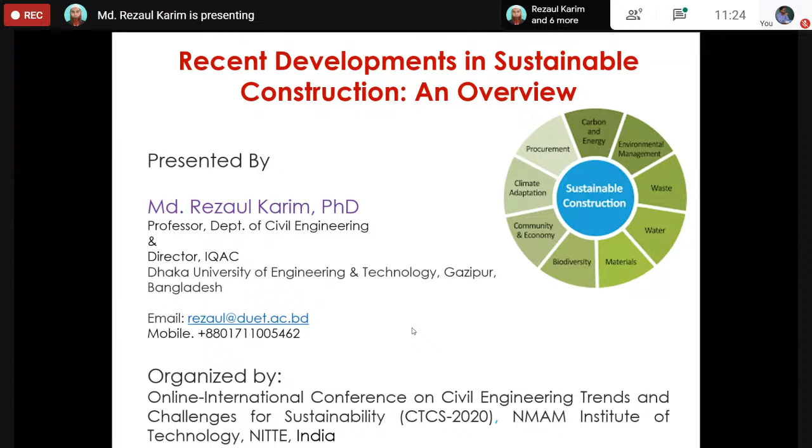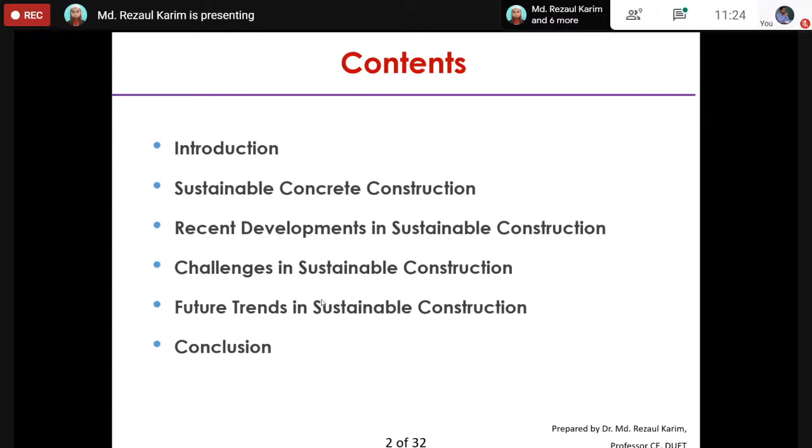Dr. Sriram has already introduced myself, so I think he has already told all the things regarding my career and also my research and additional charges. Today I will share some ideas regarding sustainable construction. In this regard, I will discuss the introduction, sustainable concrete construction, recent developments in sustainable construction, some challenges in sustainable construction, and also future trends in this area. Finally, I would like to conclude with some slides.

First, you know that the goals of sustainable construction are to reduce the industry's impact on the environment. Sustainable construction methods include using renewable and recyclable resources, reducing energy consumption and waste, creating a healthy, environmentally friendly environment, and protecting the natural environment. This is the main method and also the main purpose for sustainable construction.

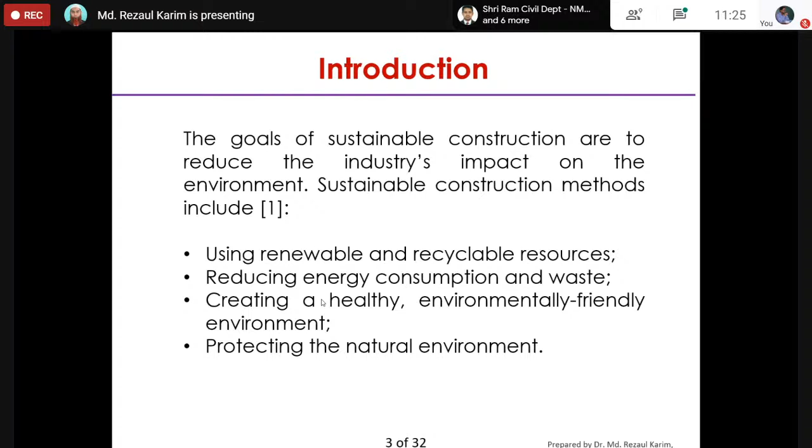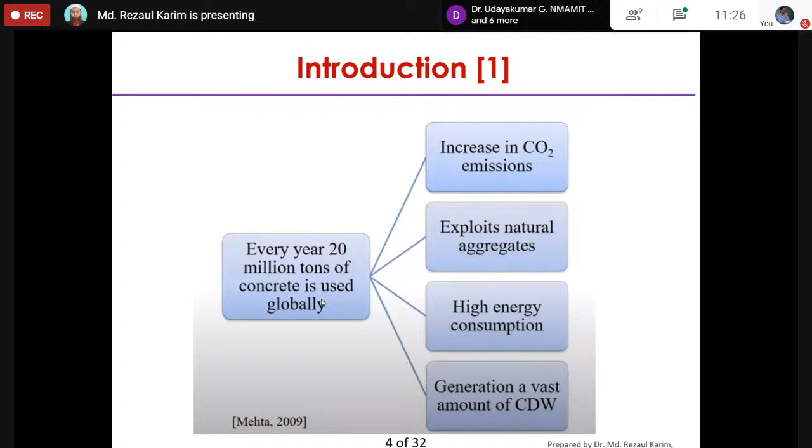In this aspect, a study from around 2009, Mehta already provided this information: in 2009, about 20 million tons of concrete were used globally. And for this reason, energy use increases carbon dioxide emissions, exploits natural aggregates, causes high energy consumption, and generates a vast amount of construction and demolition waste. I think all the students and researchers involved in the concrete area are familiar and well known with this information.

From energy use to emissions, the construction industry has a huge impact on the environment, because the construction industry uses a high amount of energy. Huge amounts of fossil fuels have been used by heavy machinery in the construction area. Even inefficient electricity use can result in the unnecessary burning of fossil fuels further down the energy supply line. In fact, the construction industry accounts for an incredible about 36% of world's energy use and 40% of carbon dioxide emissions. So the construction industry has a huge impact. I think all the researchers in this area are very familiar with this information.

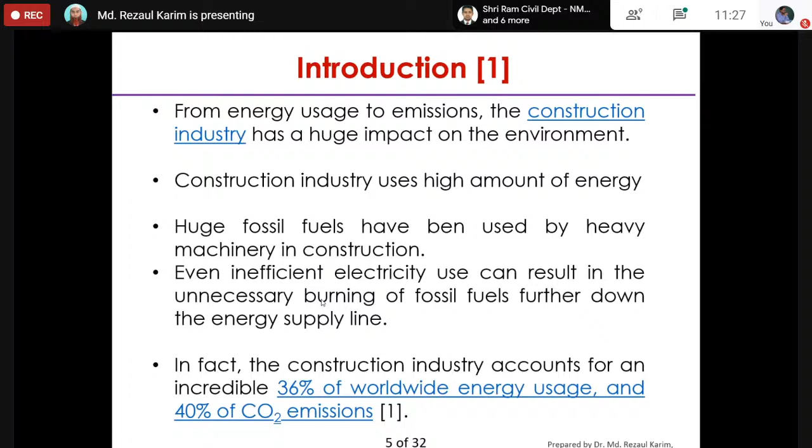In addition to this, the fabrication and shipping of materials can have a great impact on carbon emissions. Mining for raw materials can result in pollution of local water tables. The manufacture of concrete has resulted in over 2.8 billion tons of carbon dioxide. This is new information, a figure which is only going to keep increasing, as 4 billion tons of concrete is produced every year. This is the recent information. Construction can also result in hazardous waste, and improper disposal of such waste can result in pollution that affects not just the environment but also the health of the people living in that area. So these are the issues and problems arising regarding the construction area, specifically for concrete construction.

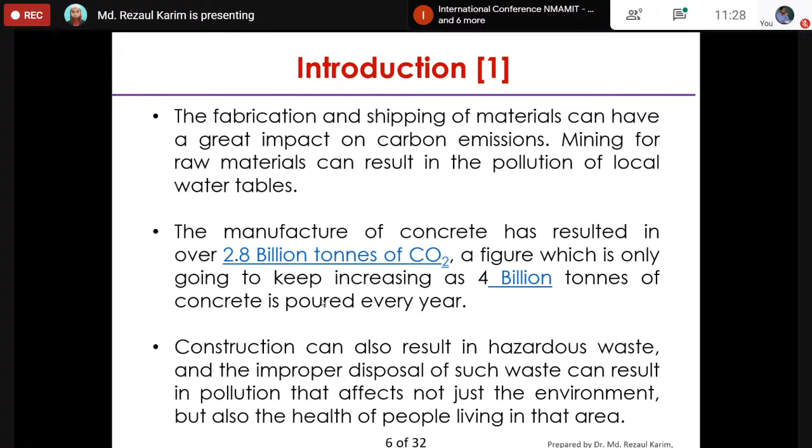This is another finding. The findings show the emission and energy requirement in cement manufacturing. Only cement manufacturing, cement without slag, I think the granulated blast furnace slag - only 30% slag reduces the energy demand and also emission of carbon dioxide. Huge changes. Also, 50% slag in cement production can reduce the energy demand. Finally, also 75% slag reduces the energy demand as well as reduces the carbon dioxide emission. So this slide is very important for the cement production industry.

That is why in Europe, America, and all over the world, the utilization of composite cement is increasing day by day regarding this issue, because without slag, the energy demand and carbon dioxide emission is too high in comparison to cement with slag and cementitious material.

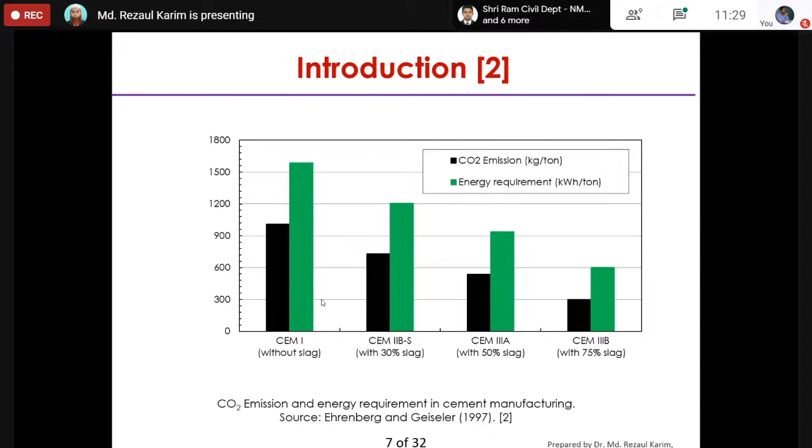Now I am going to discuss sustainable concrete. Sustainable concrete is defined as concrete that uses less energy in its production, and produces less carbon dioxide than normal concrete. This is the basic concept of sustainable concrete.

It is also known as green concrete or eco-friendly concrete in some countries. It uses eco-friendly cement, supplementary cementitious materials, and increases dependence on recycled materials.

In sustainable concrete, you can reuse water and also fly ash, metakaolin, silica fume, slag, recycled demolition waste aggregate, recycled concrete materials, recycled glass aggregate, and other waste materials as coarse aggregate, fine aggregate, or replacement of cement.

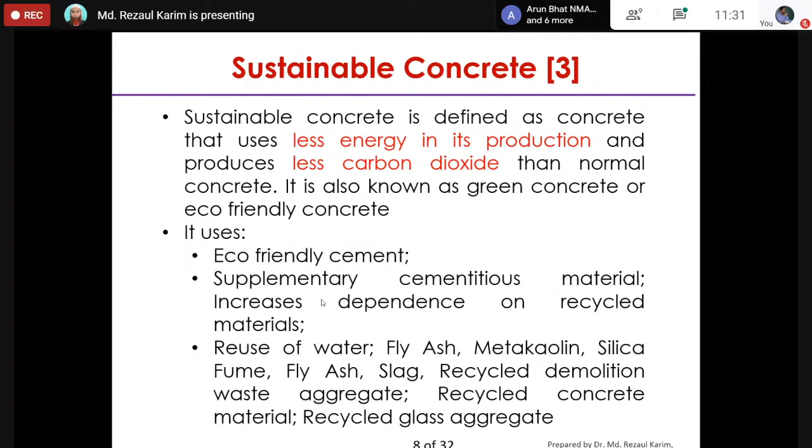This is another basic concept of sustainable concrete production: there must be a low volume of cement and low volume of natural coarse aggregate used. Also, a high volume of recycled coarse aggregate can be used, along with a high volume of slag, fly ash, palm oil fuel ash, rice husk ash, and silica fume, and other supplementary cementitious materials.

After production, the desired strength can be provided and it should be environmentally friendly. Because we use waste, minimization of waste and disposal problems can be solved using sustainable concrete production. By using recycled aggregate instead of virgin aggregate, we can preserve natural resources, and it will definitely be cost effective. This is the mechanism of sustainable concrete.

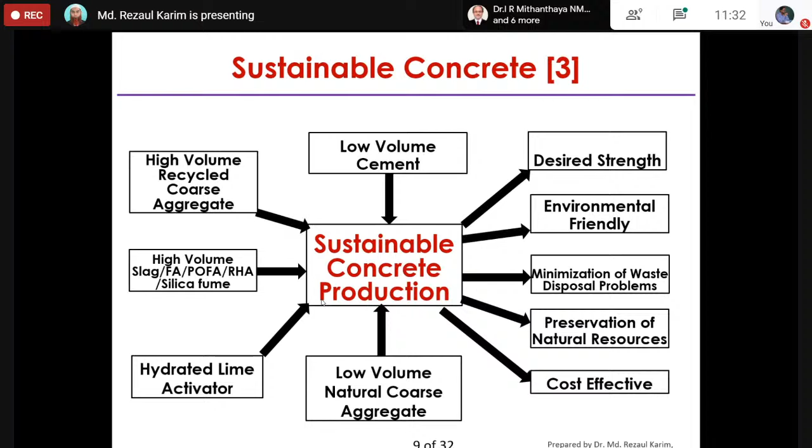These are also some information from the literature. Sustainable concrete can be achieved by rainwater harvesting and reduction in water use. It provides a 20% increase in use of waste materials, 25% reduction in weight of concrete, 30% reduction in carbon dioxide emission, 40% reduction in repair costs, better workability, reduced creep and shrinkage, good thermal and fire resistance, less heat of hydration, and less split tensile strength and flexural strength. There are no big changes, only slight changes in compressive strength.

One of the major problems is less lifetime. This is one of the problems for sustainable concrete production. This information is well known to the scientific community now. We are just sharing how to improve this area regarding sustainable construction.

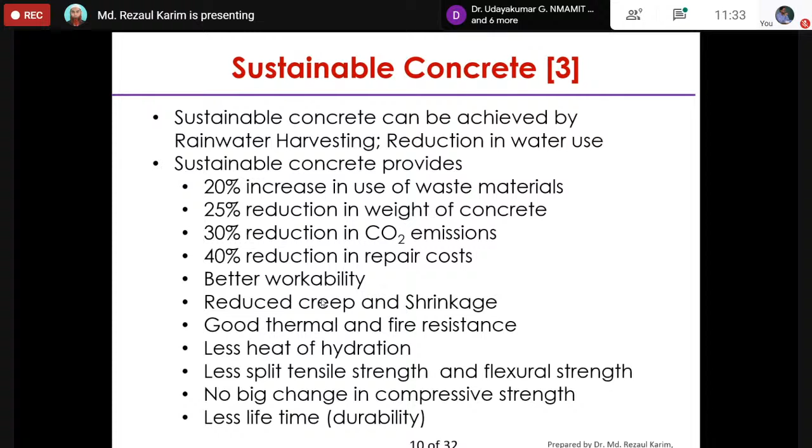Sustainability is generally defined as meeting the needs of the present without compromising the ability of future generations to meet their own needs. We know this slogan because if we use all the resources, all the virgin materials, everything during our life, our future generation will face trouble.

That is why we must consider sustainability in any area. We, the people working on concrete, are thinking regarding sustainable construction. Those working on economy are thinking regarding sustainable economy, and others in management as well. So all the people working in research and industry are thinking regarding sustainability. It is our duty to consider sustainability in construction.

There are three pillars of sustainability: environment, economy, and society. All these basic things must be considered regarding any production, any type of concrete, or any type of industry. The research must be focused on sustainable construction and sustainability.

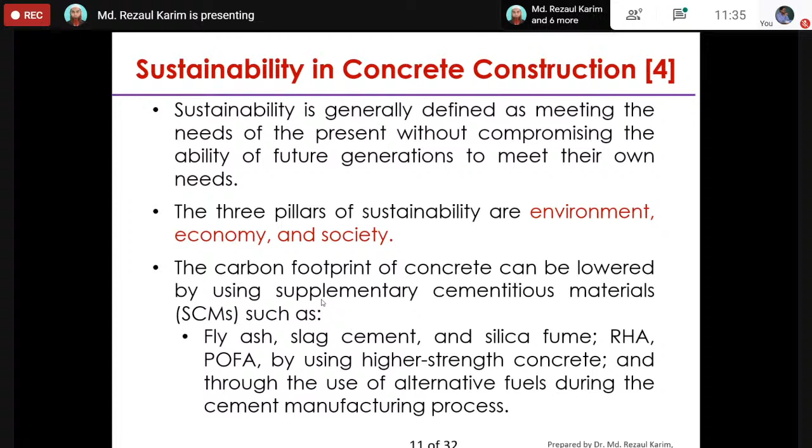These are the slogans nowadays across the world. We know what sustainability is. It must be focused on social, economical, environmental, and technological aspects, and sustainability must be feasible, equitable, and livable. All these things should be considered in our construction industry, because during any construction or production, we must focus on society, economics, environment, and technology.

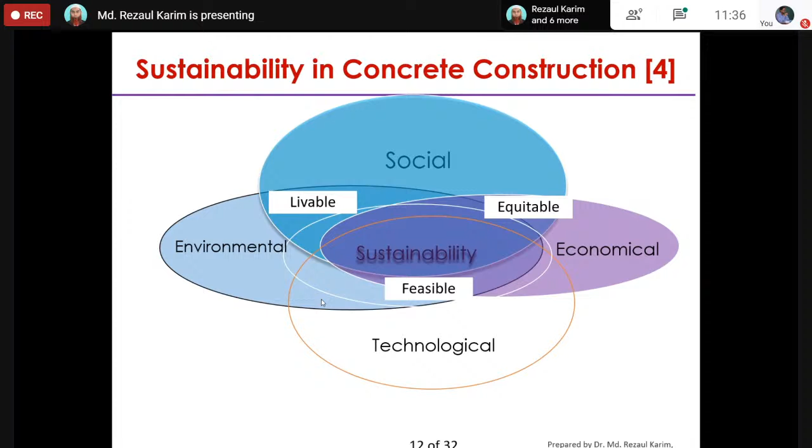Now we move forward regarding the benefits of sustainable construction. Naturally, adopting sustainable construction methods will reduce an organization's impact on the environment. There are more tangible benefits too, which will help us demonstrate the value of sustainable construction beyond environmental concerns.

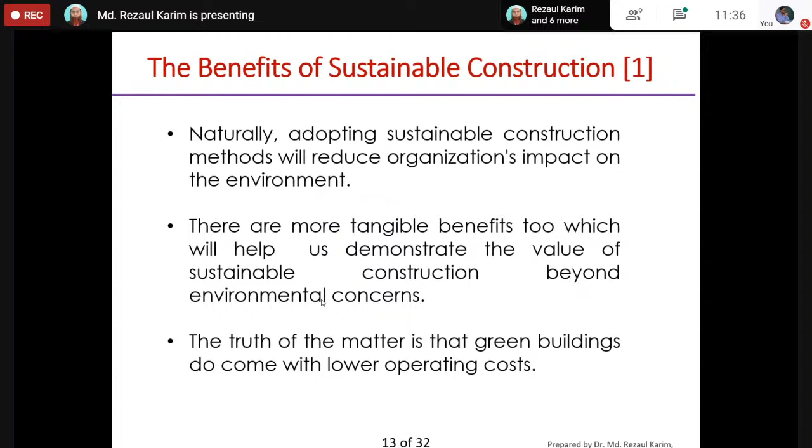The truth of the matter is that green buildings do come with lower operating costs. This is a finding from literature. The use of the latest sustainable technologies in the construction process could potentially deliver a remarkable 410 billion euros a year in savings on global energy spending.

This is another finding: there are also direct savings available for organizations by reducing waste. For instance, this will reduce the fees charged by waste management companies. This is another process that can be used for sustainable construction. By adopting more efficient vehicles, it will also save fuel costs.

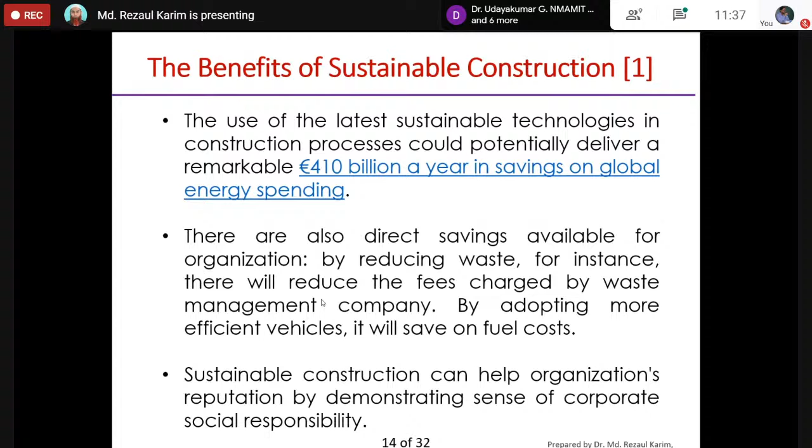Sustainable construction can help an organization's reputation by demonstrating a sense of corporate social responsibility. So there are more benefits regarding sustainable construction. I think all of this information is available to the scientific community, especially those who are using the research in laboratories as well as their studies.

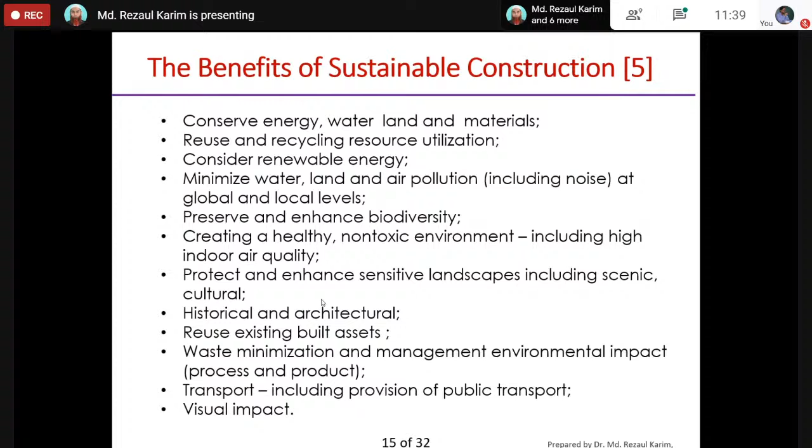So considering this issue, we must focus on sustainable concrete as well as sustainable construction. Now we'll move towards recent developments in sustainable construction.

I think this information is known to us. Geopolymer concrete is one of the latest developments. Although it was introduced by Davidovits in 1978 to describe a relation among mineral binders with chemical composition similar to zeolite, but with an amorphous microstructure.

It is a kind of concrete produced using slag or fly ash with a high amount of alkaline activator, such as sodium hydroxide and potassium hydroxide, as well as silicates like sodium silicate and potassium silicate. Usually in geopolymer concrete, the curing procedure is performed at about 60 to 90 degrees.

Another development is sustainable concrete, containing slag, fly ash, rice husk ash, palm oil fuel ash, wood ash, and so on. All of these materials can be used in concrete as a supplement for cement as well as a supplement for fine aggregate, and that reduces the cost of concrete as we've already discussed in earlier slides. Another recent development is alkali-activated binder, or zero cement binder, also called non-cement binder.

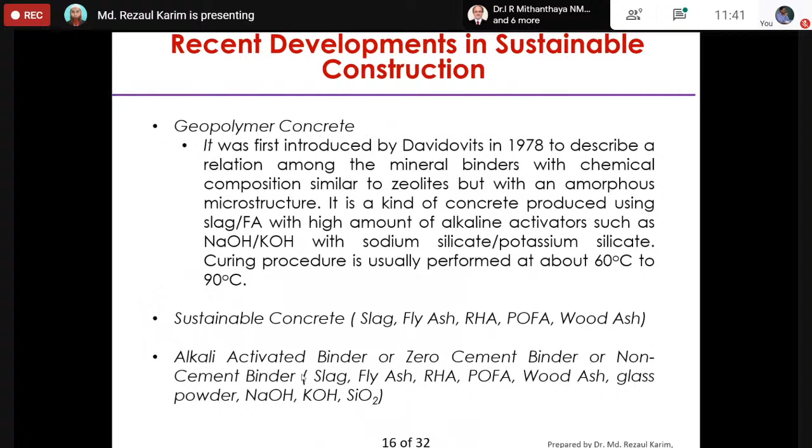This also just provides information on figures for construction service life and global warming potential, also discussing industrial waste and its remarkable lifecycle, and our demand for low carbon emission.

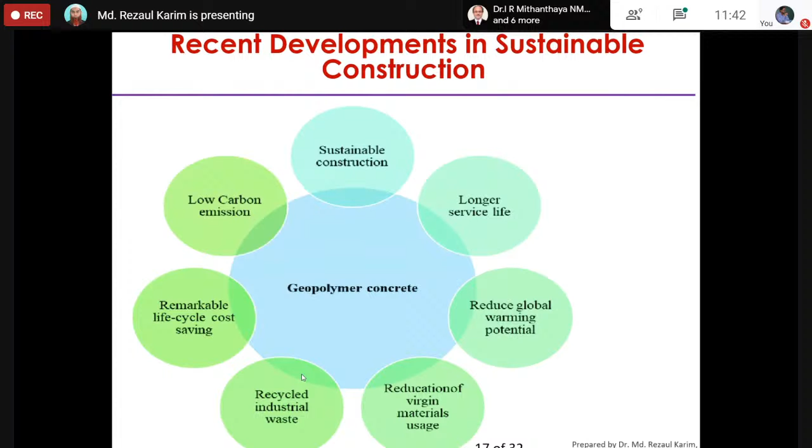Focus all the research on emissions. Global temperature is increasing day by day. That is why it is our duty and also our responsibility to sustain our world for the people, for human beings, for a comfortable life.

So it is our duty to reduce carbon emissions. You see this one, the inclusion of geopolymer material results in about 25% carbon reduction. So there is also a reduction in carbon emissions. So we can use sustainable methods for our construction.

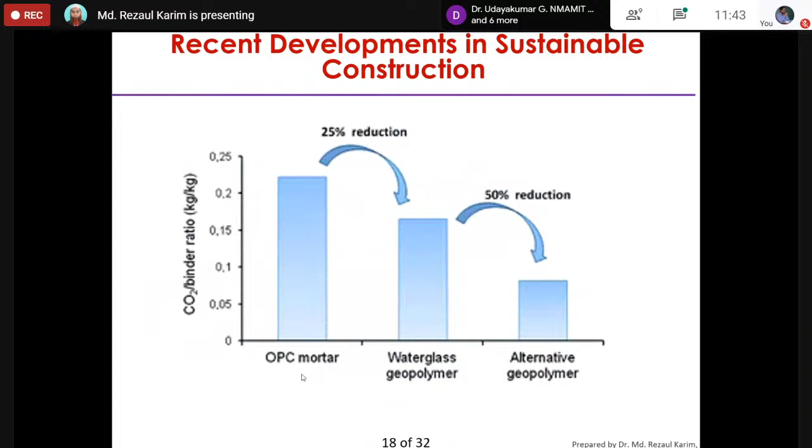These are some literatures available online. You can also see that as construction continues to expand, contractors must figure out ways to reduce their industry's detrimental impact on the environment. It is the duty of the contractors to reduce their problems on the environment.

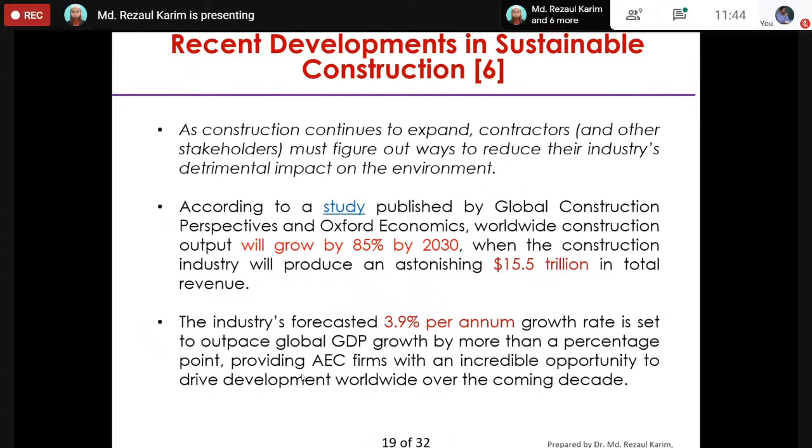While a broad-based expansion of construction industry is needed, experts estimate that 36 million new housing units will be needed to be built in the world's 20 largest cities alone by 2025. So this is the demand from the housing sector.

Such an expansion could have devastating environmental consequences. So we must mitigate and solve this requirement. It is our duty, those working in the concrete area.

Indeed, research indicates that the construction industry is already responsible for 23% of the United States' air pollution. This is another finding from the study. And 40% of the water pollution and 50% of its landfill waste. So can you imagine what's happening regarding the construction sector?

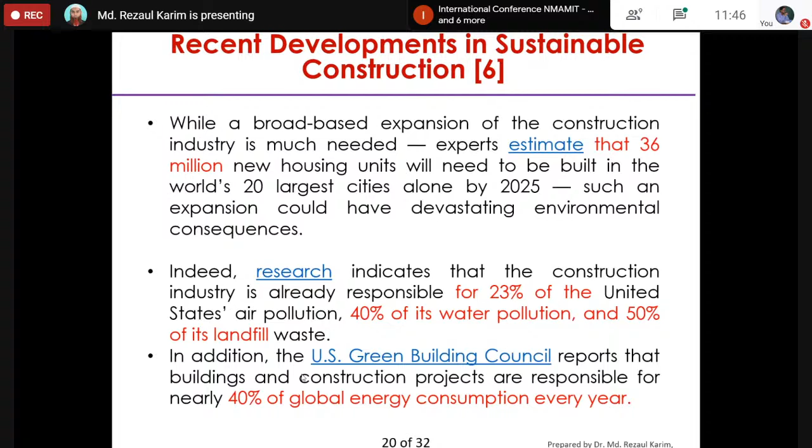So if we can manage this as a sustainable process, we can easily save our planet. In addition, the US Green Building Council reports that building and construction projects are responsible for nearly 40% of global energy consumption every year. So we the people are consuming about 40% of the total energy consumption.

Using building information modeling, we can manage sustainable construction. We are also very much familiar with sustainable construction, and we know this includes materials, biodiversity, community and economy, climate adaptation, procurement, carbon and energy, environmental management, waste and water. So all of these are involved for sustainable construction.

So we must focus to use less amount of energy and produce less amount of carbon dioxide. Our target is also to use the maximum amount of waste materials, so that we can reduce the cost as well as manage the waste for the future generation.

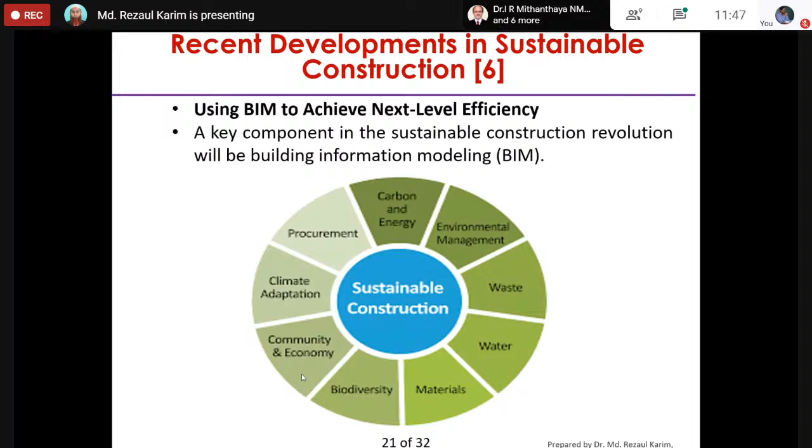These are some information regarding recent development: extending the lifespans of durable building materials. This is some findings from different literature. Also, over 160 million tons of non-industrial waste goes to American landfills, which actually comes from demolition undertaken before the beginning of new construction projects.

So this is another concern. How can we manage these types of demolition waste? Salvaging as much of this raw material as possible not only cuts down on cost. Recycled materials are often less expensive than virgin materials. It is very simple. But we must consider how we can use this recycled material for the production of construction work.

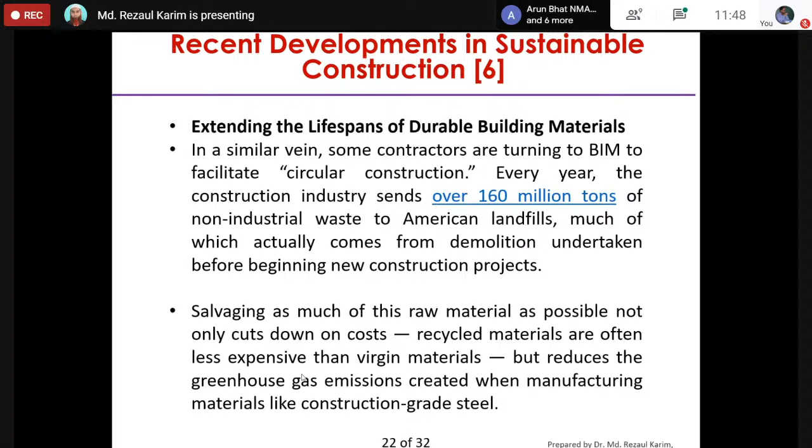And some of the industry is planning to move construction offsite. I mean, they are preparing all the elements in industry so that there will be no waste.

And finally, environmentally minded contractors are prefabricating or alternatively using offsite or modular construction. Some modern contractors are also thinking and focusing on this type of construction.

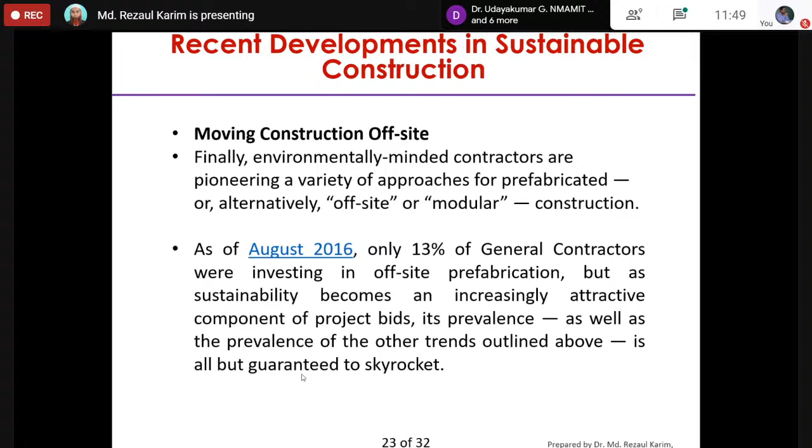Another data point: only 13% of general contractors were investing in offsite fabrication. But as sustainability becomes an increasingly attractive component of project bids, its prevalence, as well as the prevalence of the other trends outlined above, is all but guaranteed to skyrocket. So although we are focusing on offsite construction, the findings show only about 13% are motivated for this type of construction in the industry.

So these are some sustainable construction works across the globe. BRE office building, Watford, UK - the focusing point is over 1500 meter cube of recycled aggregate concrete supplied for foundation, floor slab, and columns.

Another is a building complex in Germany, with over 1500 meter cube of recycled concrete for foundation, slab, and internal structural elements. And another is from Haiti - infrastructure development, reuse of waste concrete for staircase, retaining wall, and public spaces.

So if the designer focuses on using recycled materials, we can easily manage it. From recent experience working in Dhaka city as a consultant, we already used some recycled materials for non-structural uses like false slab, retaining wall, or non-load bearing walls - where there's no load impact, you can easily handle this issue.

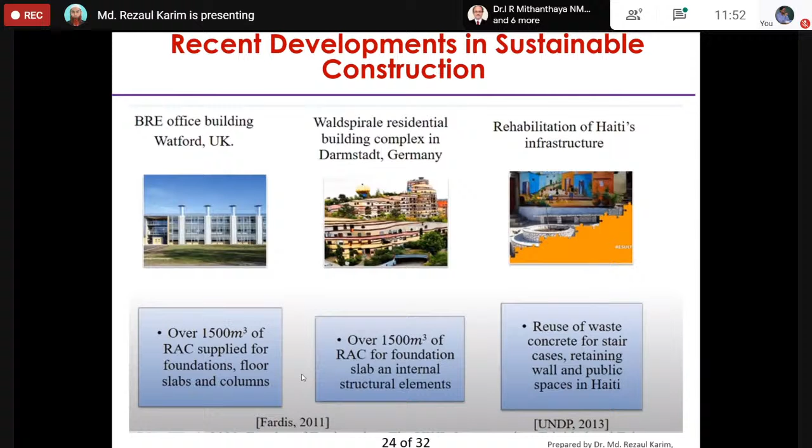So the community also needs to discuss and focus with the authority as well as the company and the designer, so that we can achieve our goal of sustainable construction.

I am going to end my presentation with some challenges in sustainable construction. Adopting the sustainable construction method is not an overnight process, because I gave some ideas regarding sustainable construction, what are the drawbacks and what are the obstacles, because it is a process.

The people who are involved must understand sustainable construction, who will benefit, and what will be the problem. The people involved in this area can inform the government so that they become bound to use recycled material.

There will always be pressure on construction organizations to reduce cost. This is another demand where possible, but there is still concern that sustainable construction methods will cost an organization more. Their thinking is that sustainable construction increases the cost of the industry.

So that is why they are not interested. The World Green Building Trends 2018 Smart Market report reveals that almost 40% of UK firms reported that affordability was the greatest challenge presented by adopting sustainable construction practice. So affordability is one of the biggest challenges for sustainable construction.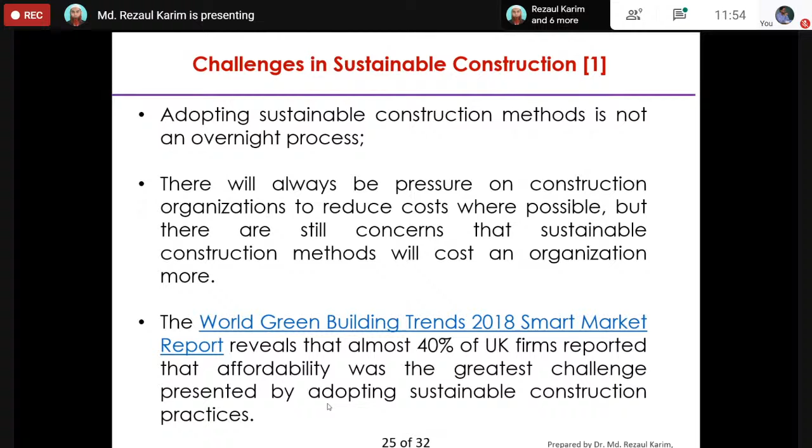And another piece of information collected from the literature: almost 50% expected that green buildings incur higher first cost. This is another report. And couple that with 34% of firms reporting that they have faced client demand for greener buildings. They have client demand also.

And construction firms fear that they will be caught in the middle on cost. So that is why they are not interested to shift towards sustainable construction and sustainable concrete also.

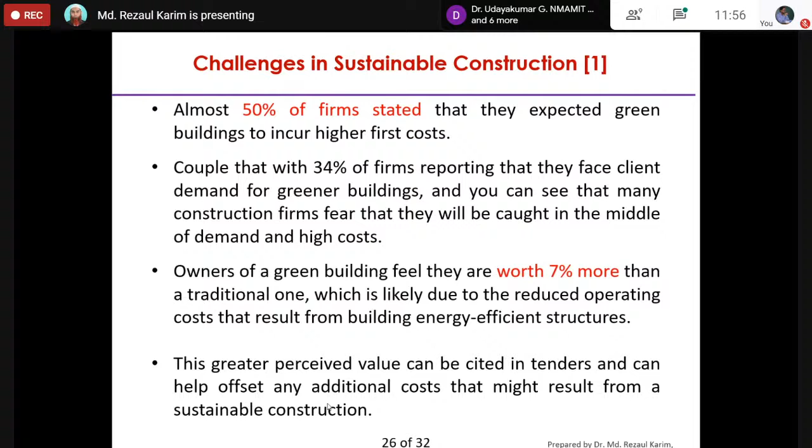So these are the main challenges, and we have more challenges, because as I already discussed, people are heavily used to traditional concrete from long years before. So we have the duty to focus on how to use sustainable construction and sustainable concrete, otherwise they cannot be motivated to shift their traditional practices to more advanced construction technology.

So for future trends in sustainable construction, this slide has been created by myself, and this is my thinking. We have the slogan: there is no waste in the world. Everything should be used as a resource material. If we can stand by this issue, sustainable construction should be achieved.

And another requirement is minimum use and losses of energy during construction. This type of research has been continuing across the globe on how to reduce energy losses and energy use for any vehicle or any type of operation.

And also, maximum utilization of waste is the main criteria for sustainable construction. We must ensure the utilization of fly ash, slag, palm oil fuel ash, rice husk ash, wood ash, and so on. All the waste material, how can we incorporate it into the construction industry, either as a partial replacement or as a coarse aggregate, any form of construction material we must use in construction.

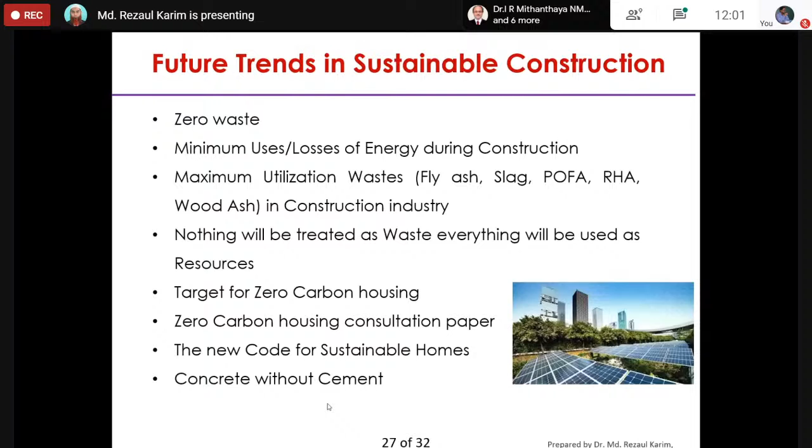So this is of my presentation, I think concrete has general properties including versatility and resilience, durability, and relatively low cost, which makes it the most widely used building material in the world. That is why its popularity is increasing day by day.

So we must focus on how to introduce waste into concrete so that our waste materials can be used as a resource, and also the cost of concrete can be minimized. Architects, engineers, researchers, and concrete practitioners have immeasurable opportunity to incorporate sustainable development. It is our duty. We have to take the opportunity into the selection of material for the manufacturing of concrete.

Because we, the people involved in this area, have to push, we have to engage people for sustainable development as well as sustainable construction. It is our duty. And also we must give consultation to the government and our authorities, the mayor, the chairman of the city, so that they prepare a plan and a law for sustainable development as well as sustainable construction.

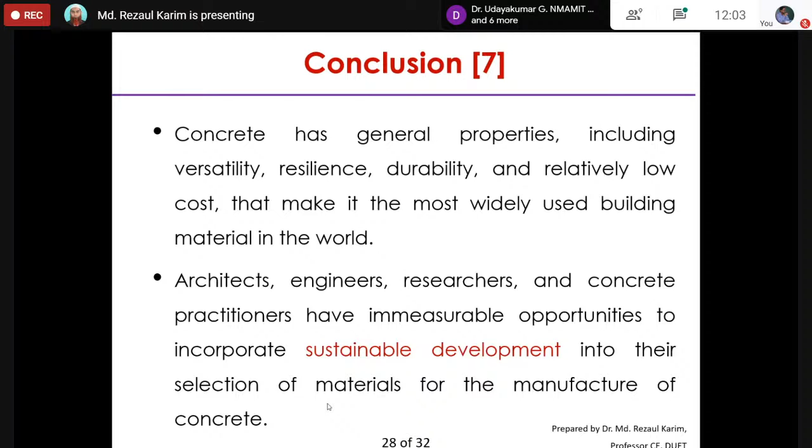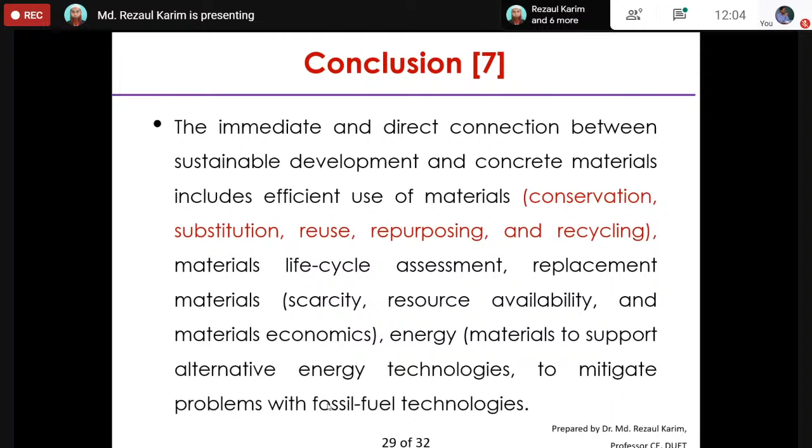And the immediate and direct connection between sustainable development and concrete materials includes efficient use of materials, conservation, substitution, reuse, repurposing, and recycling. This is the slogan, I think, for sustainable construction and sustainable concrete. And materials life cycle assessment, replacement of materials, and energy demand and alternative energy to mitigate problems with fossil fuel technologies. So we have to focus on reusing and how to reduce the energy demand from the construction sector. This is another important issue, how to reduce the energy demand from the construction sector.

And at last, I can say that to increase energy efficiency, we must mitigate the undesirable environmental impact from technology and economic growth. So if we use energy efficiently, it should mitigate the problems from environmental impacts. So it is the researcher's duty to create machinery that is energy efficient, so that it uses less energy but produces maximum efficiency.

And another point is to set in mind all concerned in sustainable construction and sustainable concrete for sustainability in construction. So it is another problem, and we must solve it, and we must consider that we will engage sustainability and focus on sustainability in concrete construction and the whole construction. And I also discussed this issue. We must prepare a national policy to use waste in construction, or sustainable construction, or sustainable concrete construction, so that people are bound to reuse recycled material in concrete.

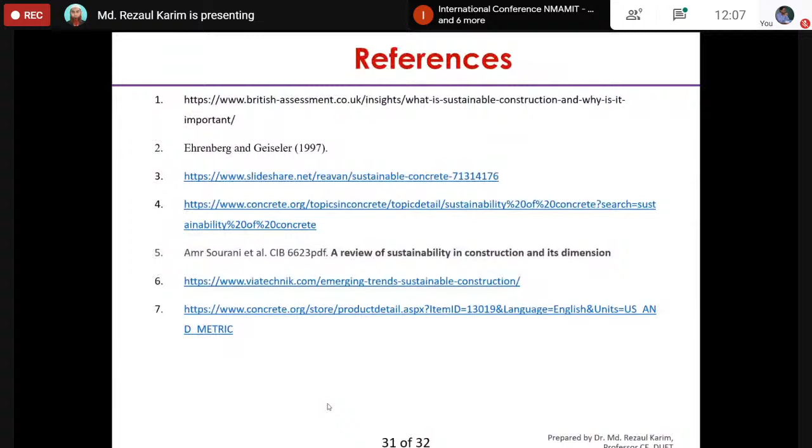So you have included a lot of information on sustainable construction and its advances and recent developments. You have also included the concept of sustainable concrete, eco-friendly concrete, and the importance of using industrial waste products to generate concrete as a construction material, and how to achieve sustainable concrete. You also highlighted the problems associated with sustainable concrete, which is really a scope for future researchers who are planning to work in this area, and the benefits of sustainable construction, the recent developments, and the challenges in sustainable construction. At the end, you gave the future trend, mentioning zero waste, that there should be no waste in the world, and that our research should be in such a way that whatever waste is generated should be reused to the benefit of society. Finally, you concluded the session by giving all the important outcomes from your talk.

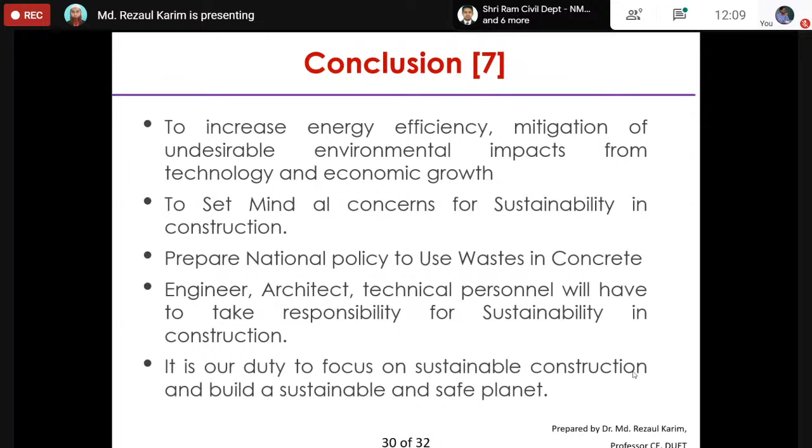Professor Rezaul Karim, thank you for accepting our invitation and giving a very informative and nice talk, sir. Your talk on the construction industry and its sustainability was very informative, and I think we need to concentrate more on this. Your idea of making it zero waste is also a very good, novel idea. So on behalf of the Civil Department, I want to thank you for your nice presentation. I think it's very informative.

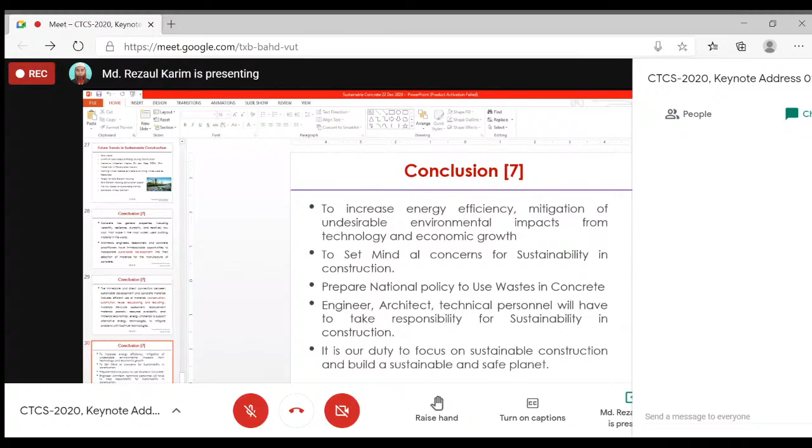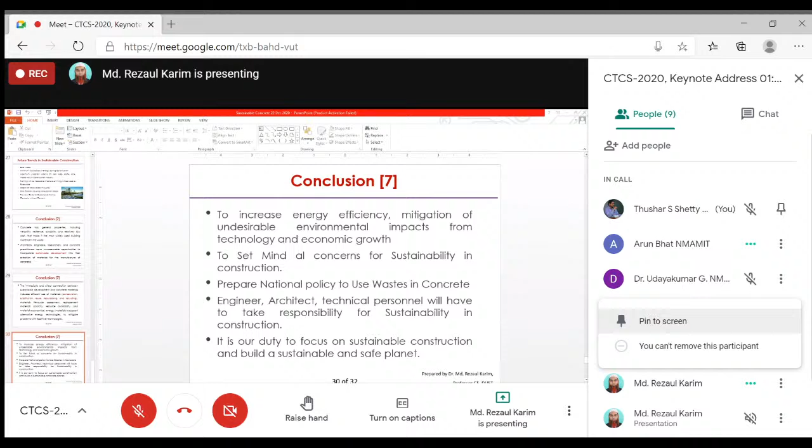Very good afternoon. Let me first of all convey my sincere thanks to Dr. Muhammad Rezaul, who spoke on recent developments in sustainable construction. Sir, as you rightly said, a lot of research is going on in all countries and institutions, and you have explained how the research activities are going on, and as you rightly said, there are so many challenges. I will also agree with you. Even though we are doing a lot of research work, especially in the construction industry, the civil engineering side, that has to reach society. But unfortunately, only a few developed countries are now using this alternative cement and sustainable construction concrete.

In developing and underdeveloped countries, we are still lagging. The main reason is, as you rightly pointed out as the challenge, the mindset of the society has to be changed. Otherwise, whatever research work is done in the laboratory will not get a good outcome, because very good results have come from this research.

So alkali activated concrete using fly ash and other non-conventional materials can be used; it has already been proved by research. But the only thing is, we are much worried about how this has to reach the construction industry and our construction engineers, including everybody, especially civil engineers, who are constructing buildings or any project. They should be convinced, and that is a great responsibility.

And one more thing, as you rightly said, is national policy. We should work on how to incorporate all these things into our national codes. Otherwise, it is very very difficult, because when you do research on non-conventional concrete and approach the government sector, the government people will not agree so easily, since they have to follow their policy and use their codes. So without incorporating this research into the code books, it is very difficult to implement.

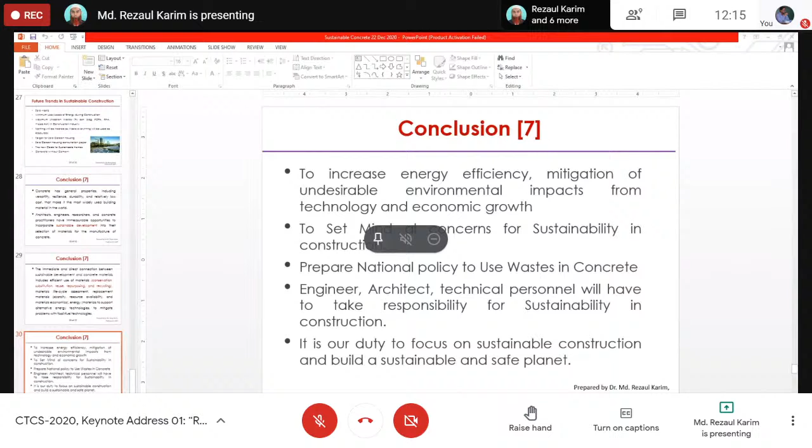Okay, thank you sir. You have also provided a core conclusion from my presentation. You also gave a lot of information on how we can achieve our goal. It is very difficult, because people are not convinced, and they are not bound to follow us, because they are looking for the simple way, always the straightforward way. That is so, you said well. But we researchers have a duty - how can we challenge and save our future generation, as well as save the people, because the cement industry...

It depends on time, in fact, because people have to adapt to their situation, because they have to survive in the world. Because of the COVID situation, we are already adapting - all universities have already adapted to this situation and handled it very carefully and safely. So regarding this concrete industry, people will have to discover the thinking to survive the world.